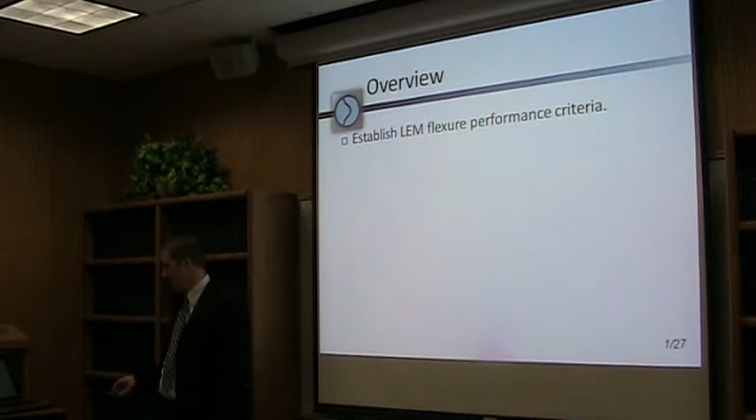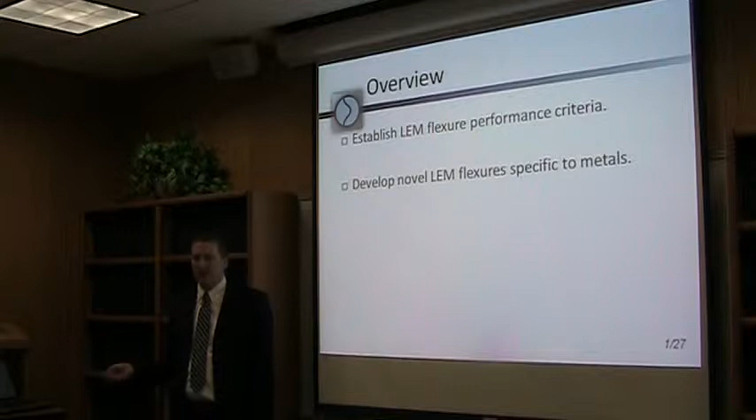First off, I'd like to establish my overview of what we'll talk about today. First, we'll discuss LEM flexure performance criteria. Next will be the development of two new novel LEM flexures suitable for metals, and the application of these LEM flexures in a mechanism.

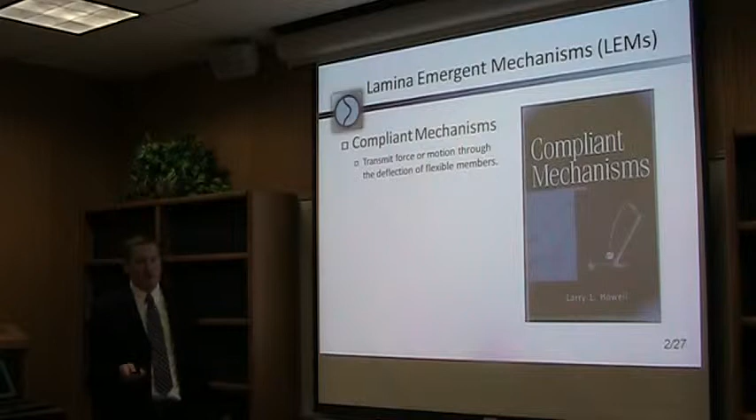First, I'd like to discuss what lamina emergent mechanisms are. We're all very familiar with compliant mechanisms, which transfer force and motion through the deflection of flexible members. Lamina emergent mechanisms are a subset of compliant mechanisms that are manufactured out of a planar material and then function out of that plane of fabrication.

I have an example of a lamina emergent mechanism here that was built by a previous student. It's a 4-bar mechanism. As you see, it emerges out of the plane. I'll put specific force on it, and I could pass this around. I know we've all seen it hundreds of times before, but it's a very good example.

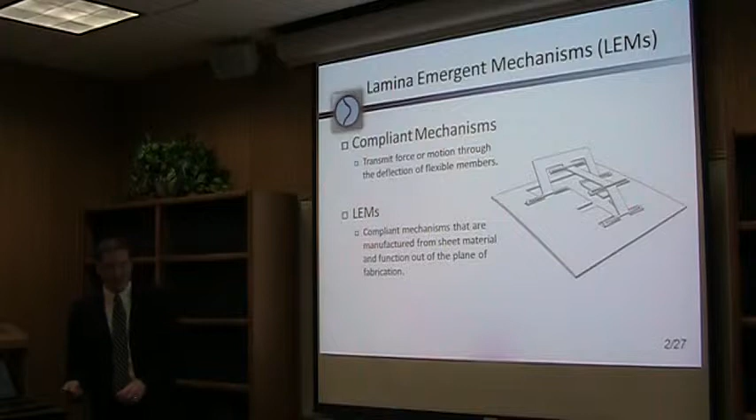Next, I'll discuss a little bit about past research, what's been done before. The materials for the LEM joints that have been made have been specific to materials more like thermoplastics and papers. Right here you see a LEM joint, or a LET joint, developed by Joe Jacobsen.

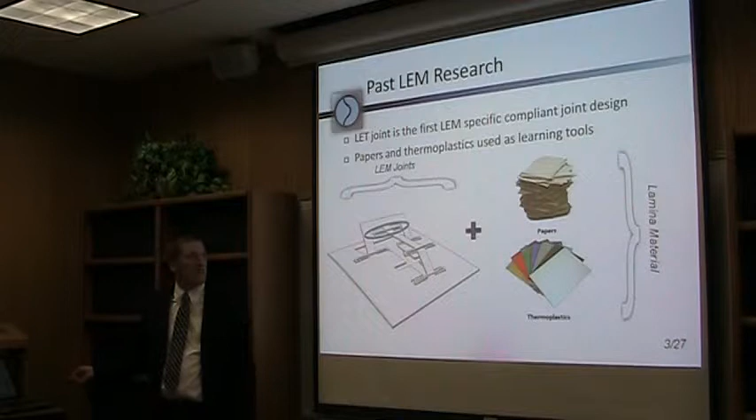These materials I mentioned have been used as learning tools or building blocks toward the ultimate goal material to be used, which is metals. The reason metals have always been the goal in mind in LEM research is, first of all, their low-cost manufacturing processes that are inherent to sheet metals - things like stamping, blanking, and so forth, where you could theoretically build an entire mechanism with just one stamp. Also, metals have unique mechanical characteristics that are very useful.

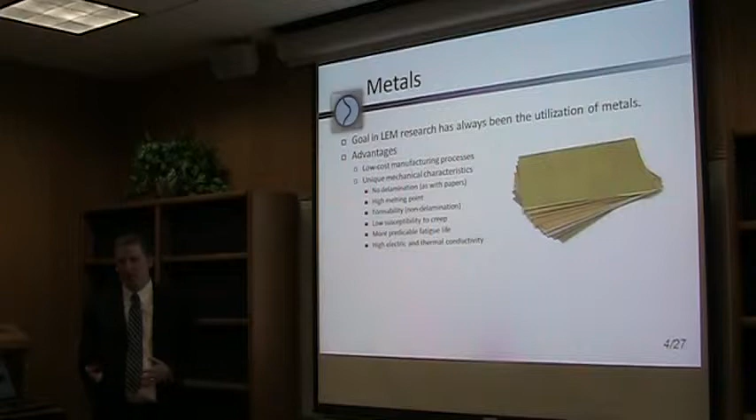First off, there's no delamination, which is something we see in paper. It has a high melting point, has good formability, which allows a new dimension that hasn't been looked at before in creating LEM flexures, which are LEM joints, which we will talk about next.

Low susceptibility to creep, which is important in compliant mechanisms in general, more predictable fatigue life, and higher electrical and thermal conductivity.

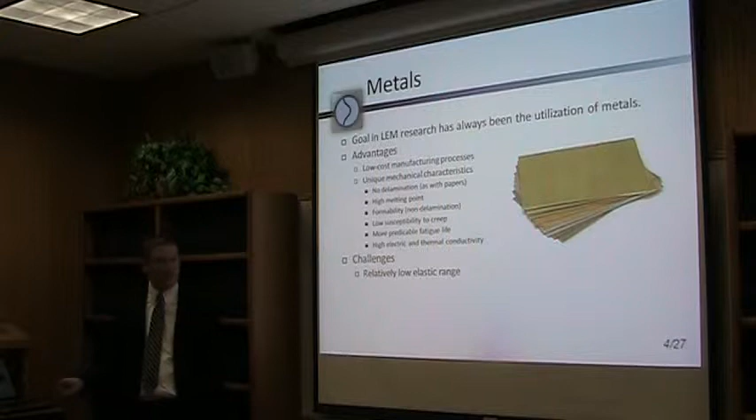Some challenges, just to list a few: metals have a relatively low elastic range, which is an issue in compliant mechanisms. Material cost is often more expensive than regular plastics or papers. Weight may also be an issue, because metals are heavier than other materials on average.

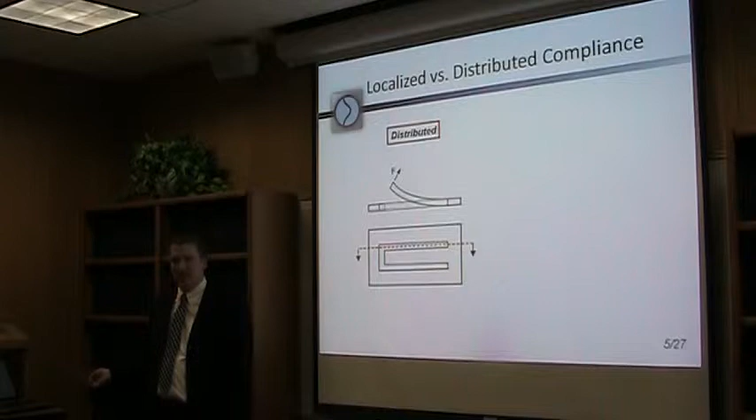Since we are talking about LEM joints, let's talk a little bit about the difference between distributed and localized compliance, or what's sometimes called lumped compliance.

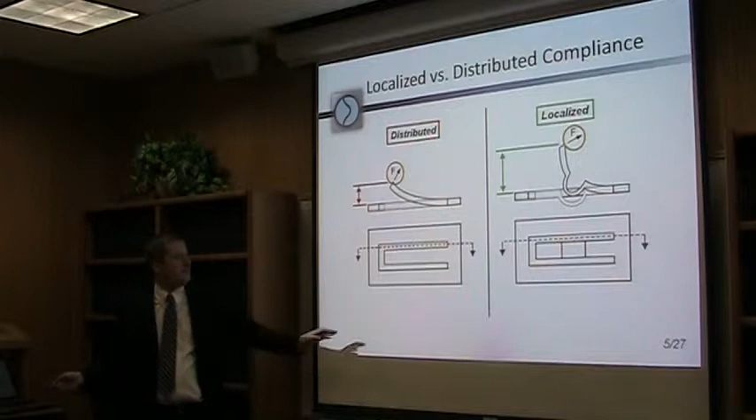So we have two beams, identical lengths on both sides. One has no flexure, one has a flexure as shown in the example. Both have the same force applied. The flexure allows a greater deflection in this figure than the one over here, which is a great benefit.

Let's discuss some other potential advantages to using LEM flexures. One is improved off-axis stiffness ratio, which we'll talk about in detail later. This basically describes how well the flexure, or the joint, would behave in multi-axis loading.

A smaller overall footprint. You can imagine if we were to keep the thickness and width of this one constant, we'd have to make it longer to get the same deflection we get with the joint.

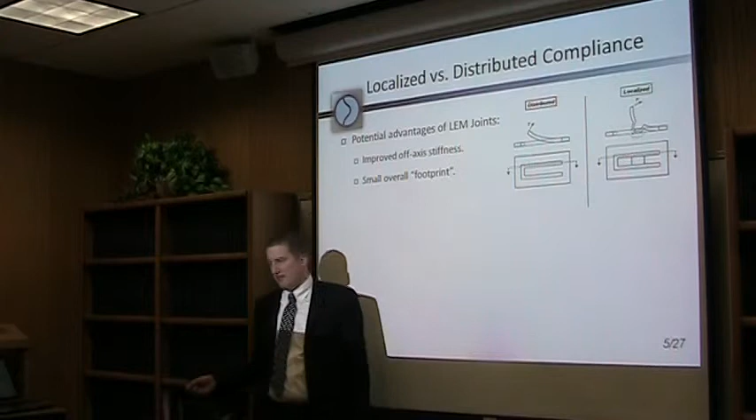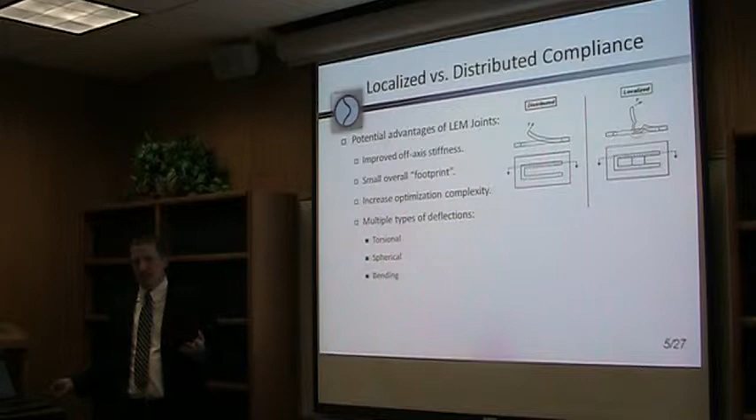There's also a potential to increase the optimization complexity with topologies, because we have more options for creating deflection. These options could be a joint specific to torsion, bending, spherical application, and so forth.

Even though I've been intermixing these two words so far, previous research in LEM joints has specified LEMs as joints, such as the LET joint. However, in metals there are joining processes between two pieces of metal that are very well known, such as lap joints, butt joints, T-joints, and so forth. So to eliminate any confusion, in my research I have referred to these joints as flexures.

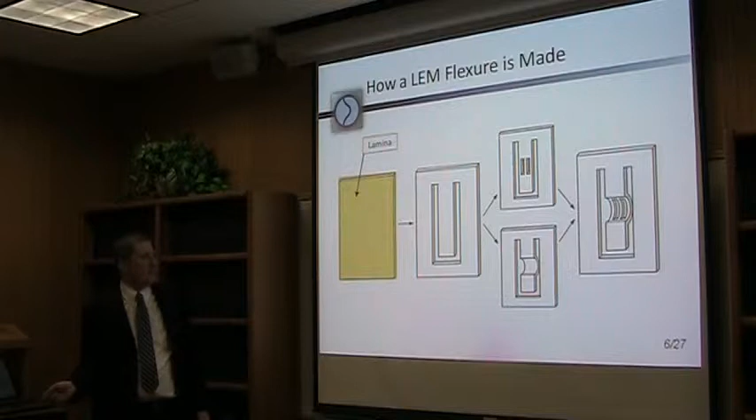Let's look at a little bit of terminology and the process of how a LEM flexure is made, and how we can use the formability of metals to help us out there.

First we have a lamina, then in the lamina we cut out a LEM member. We can create a flexure through removal of material, which has been the past research, or the new research in metals can branch us into forming, or you can use a combination of those.

Now in flexure design, a good question to ask: what are we trying to do? What are we trying to improve from? Do we have a baseline we can look at while designing these flexures to see if they're good flexures?

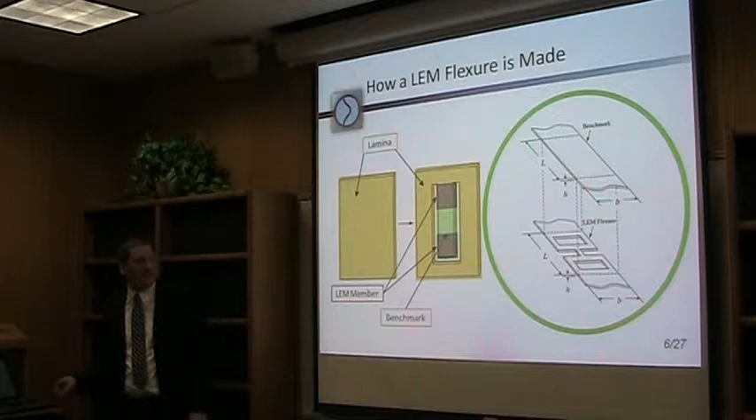So I've developed a concept of a benchmark, which is a strip of LEM member that is the same overall length, width, and thickness as a LEM flexure, as you see in the example. We'll use this more extensively later as we talk about the LEM flexure criteria.

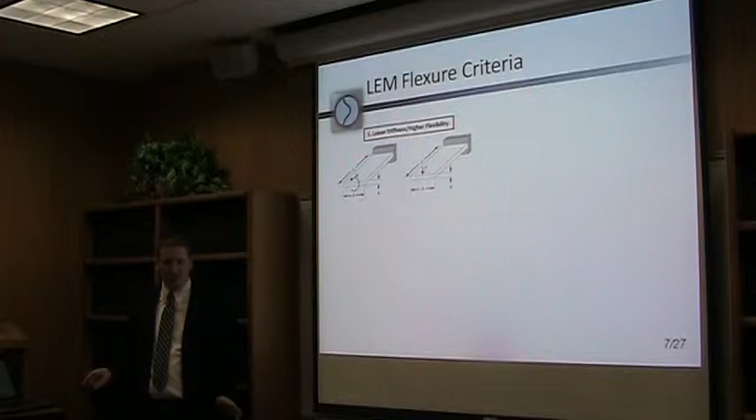Viewing all these things, and knowing there is a baseline that the LEM flexure should improve on, there are three criteria that have been developed to describe this improved performance.

First of all, it would be very nice to have a lower stiffness, a higher flexibility, brought by the LEM flexure over the benchmark. Also, larger maximum motion, as we talked about before in the figure we showed.

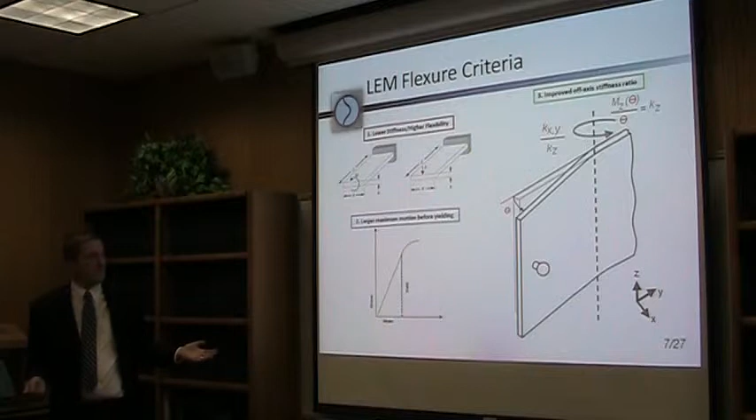Now stiffness is along the other axes, which we wouldn't want the door to deflect around, shown as ky and kx.

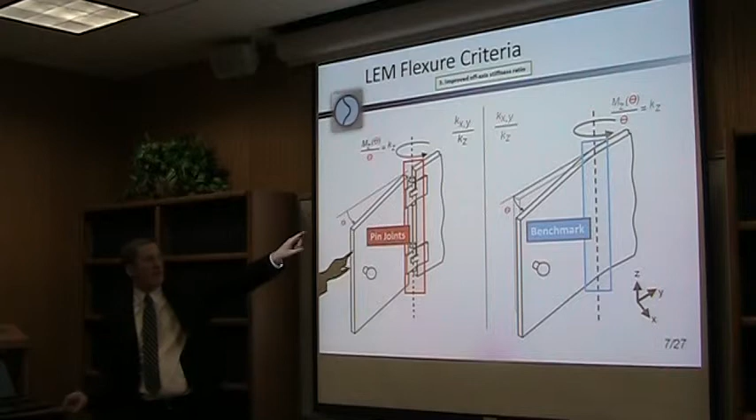Now if we compare this door to a rigid door, the box highlights the points of comparison. We can easily see that this ratio of the undesired axes of deflection and rotation over the desired will definitely be greater with the pin joint. So we see an improvement.

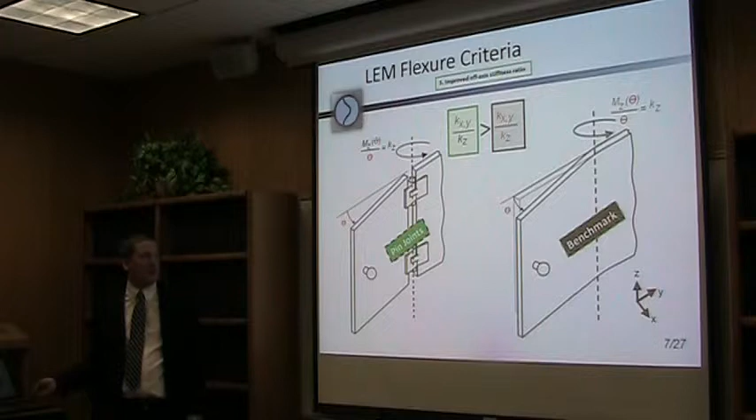So we would like our LEM flexures to have a similar characteristic, in that their design axis of rotation is improved over the other two, or if it's multi-axis, the other one, or whatever have you.

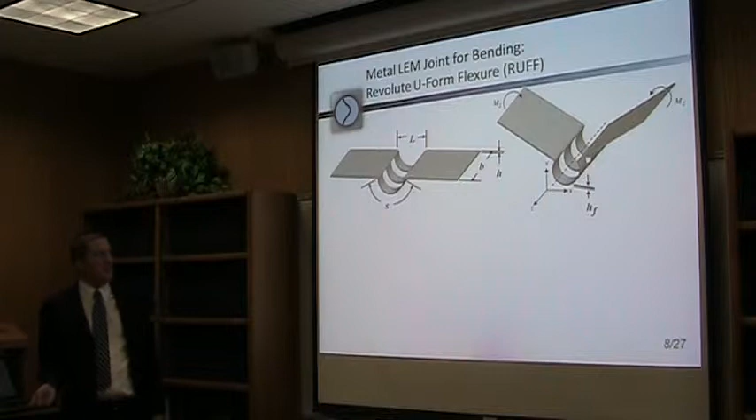So let's look at the first novel LEM flexure. This is the Revolute U-form flexure, as shown in the figure, in the undeformed and deformed positions.

The concept of this flexure was brought about by a research paper by Dai, where he described how you could model a die crease in a piece of cardboard as a revolute flexure.

So here, let's look at kind of theoretically what this joint does for us, or should do. We have the material property dependence and the geometric dependence. The material we won't discuss here, but let's discuss a little bit about the geometry.

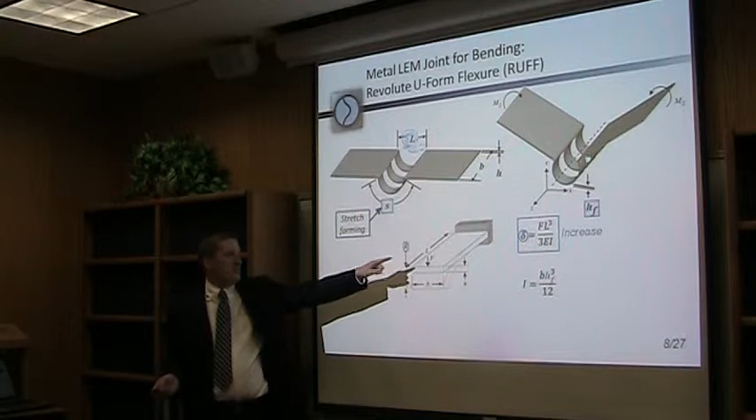The RUFF is designed to be formed through stretch forming, which causes this preformed length to stay the same - that's why it's encased, because it's held constant. This causes the length to increase locally and the thickness to decrease, which causes, going by the equation we have there, the deflection to increase also.

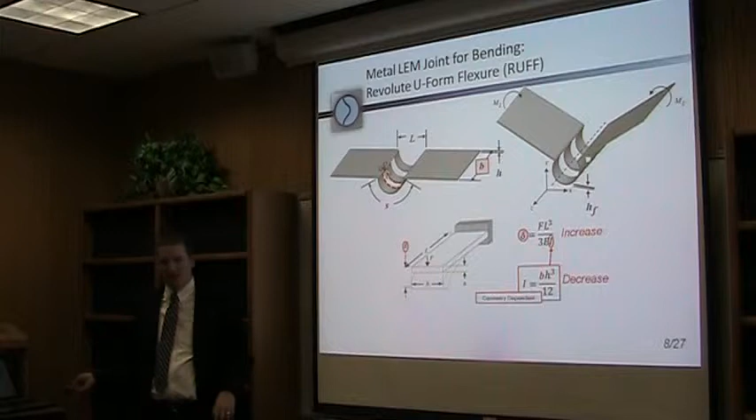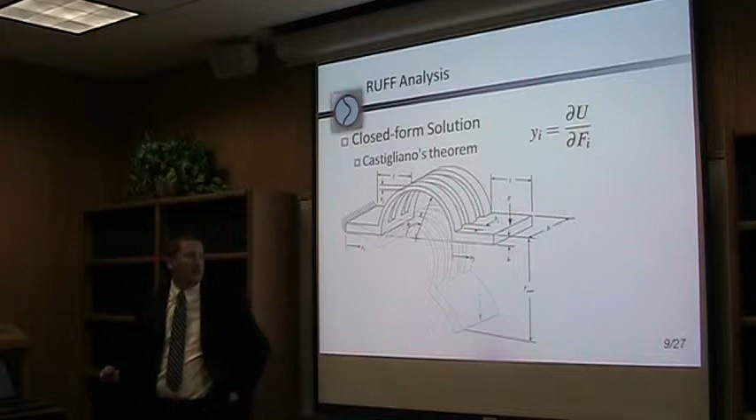Also, we find that decreasing the width will also decrease the moment of inertia, thus increasing the deflection. So the closed form solution we used was Castigliano's theorem, which was the partial derivative of the strain energy over the force within the RUFF joint.

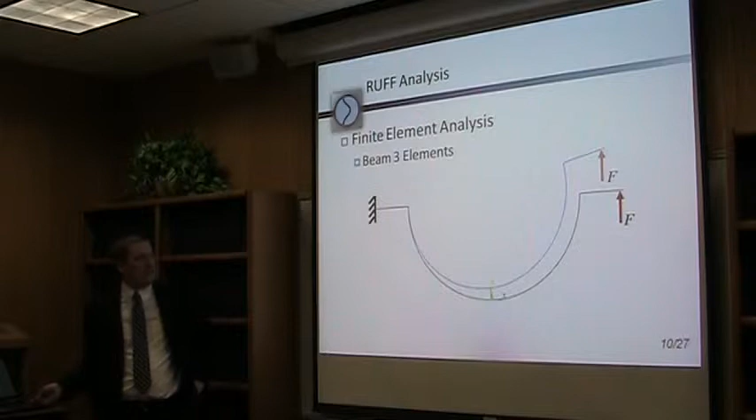And I also created a finite element model with ANSYS using BEAM3 elements. And the elements in the middle, where you have the curved portion where the slots would be, I just modified the material properties for those beams accordingly.

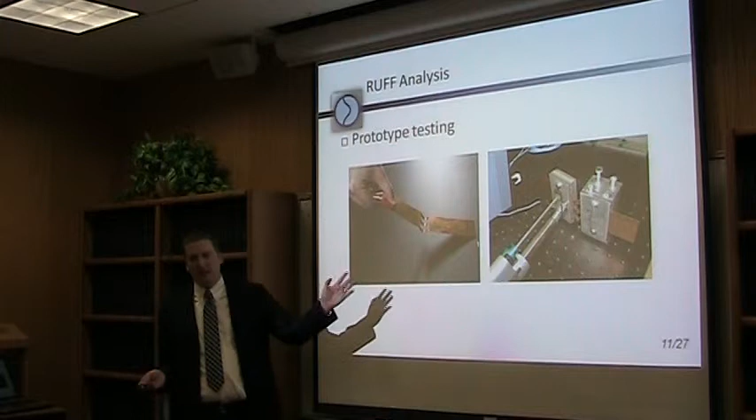And applied a non-follower force, with fixed placement on the end. The reason for those specific boundary conditions was the test setup that we had available to test this joint. As you see there on your right, it's being tested in the test fixture with a load cell gathering the needed data. And I have the actual physical prototype here - I'll also pass around the RUFF joint.

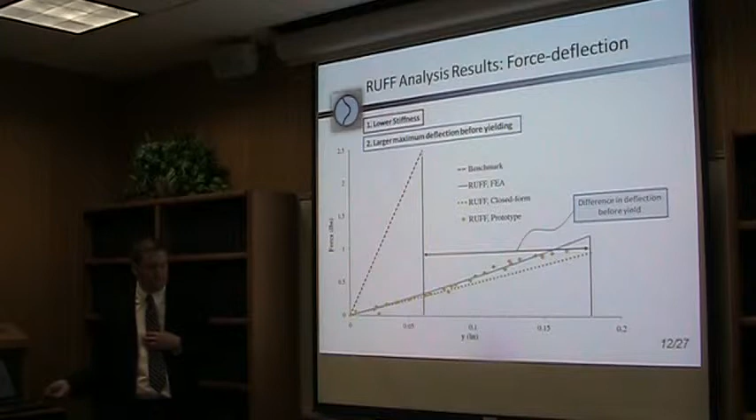So let's look at the criterion. First of all, does it provide a lower stiffness? Well, if we look at the force deflection curve, we can see that the stiffnesses are different and the RUFF is lower. Also, does it have a larger deflection before yielding? It does, as we see, it's very apparent.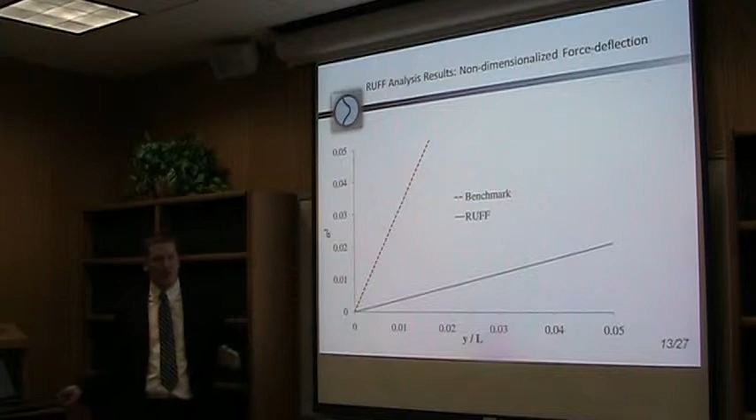Also, I made a non-dimensionalized plot of the data given in the previous plot, and fortunately we also see a difference in slope the way that we like to see.

So off-axis stiffness was also calculated, the stiffness of the torsion axis over the stiffness caused by a moment. And in this instance, the higher the off-axis stiffness ratio, the better. So the blue line representing the RUFF is indeed better than the benchmark cutoff, again at the yield point - so we see an improvement in off-axis stiffness ratio.

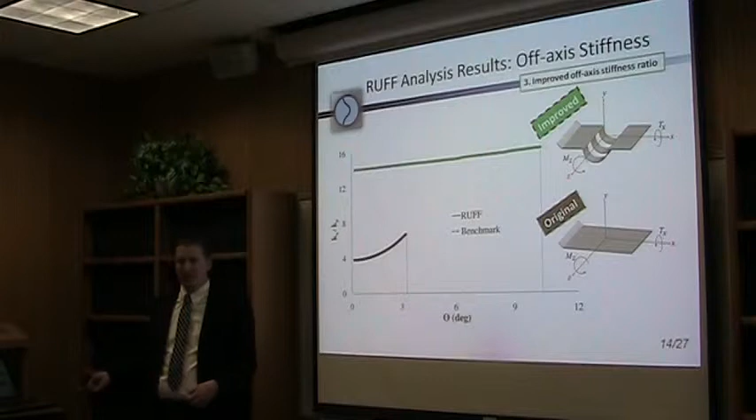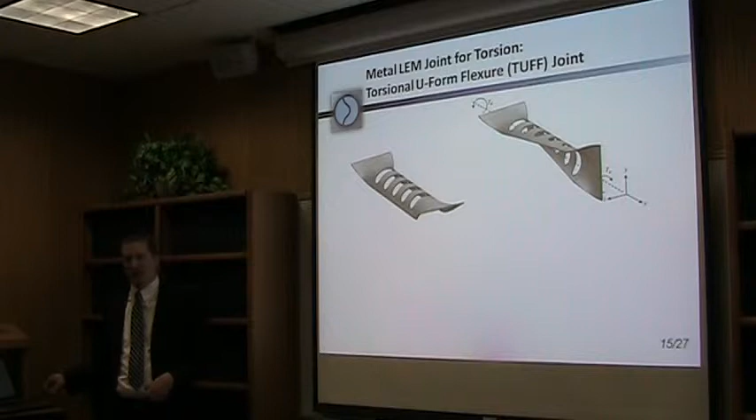So now we've discussed the RUFF, let's go over the TUFF joint, which is a torsional U-form flexure, and this one is design-specific for torsion. And as with the RUFF, let's look at some of the things that make this joint ideal.

So as we decrease the width here, even though it's not as easy to see in this equation as it was in bending - this is a torsion equation here - we have a decrease in width, and that would cause an increase in rotation.

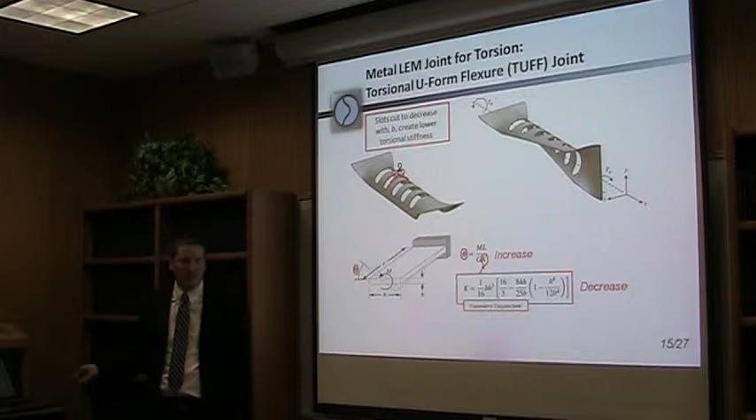Also, the decrease in width would... Could you go back to the previous slide? Yes.

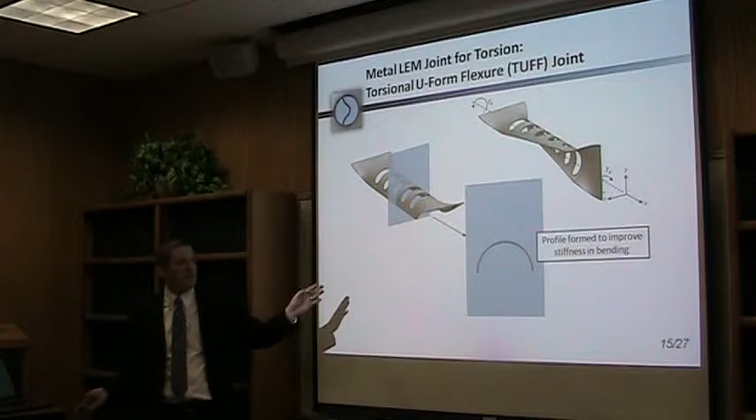The polar moment of inertia. This decrease in width would potentially create off-axis problems in bending. So to eliminate that anticipated problem, I designed a round profile form for the joint.

I created a finite element model with ANSYS shell 93 elements, and here are some of the boundary conditions I used. I fixed one end, made it infinitely stiff, and set boundary conditions at three key points. The two on the edge were set so when torqued, the model wouldn't...

...compact in the y-axis due to— wouldn't pull in, right? Yeah, wouldn't pull in, exactly. Looking for the right word. And here, the translation in all three axes were fixed.

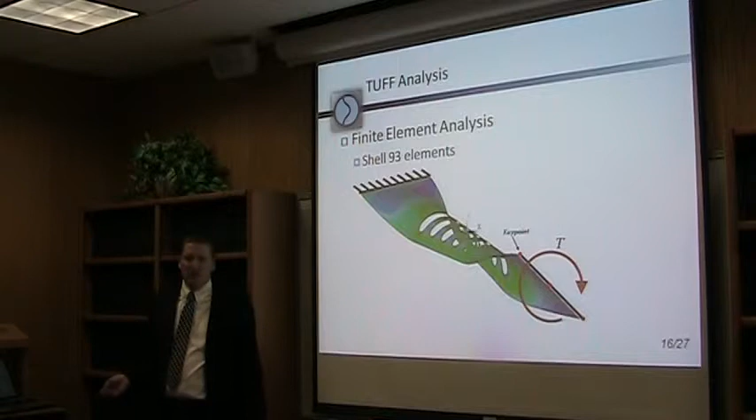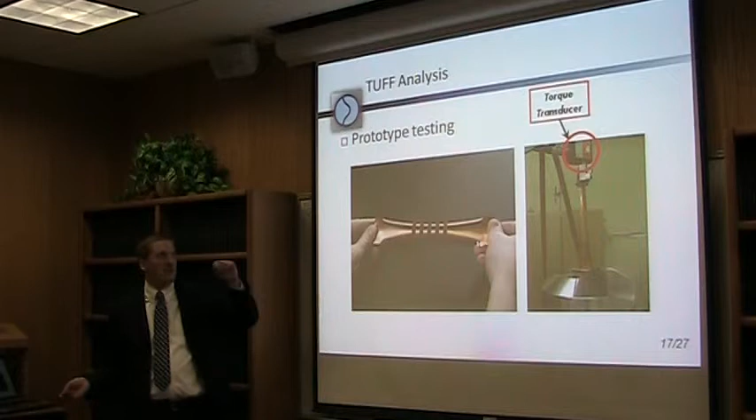Torque was applied to create the motion we wanted. Here we have the testing of the prototype in the Instron with a torque transducer used to get the torque rotation curves. Again, we have the benchmark and two solutions for the TUFF. The data compared between the prototype and the FEA very well.

So let's look at the criteria. First, you do see a difference of slope, not as much as with the RUFF, but it is a difference, especially the closer you get to the yield point. There is larger rotation before yield.

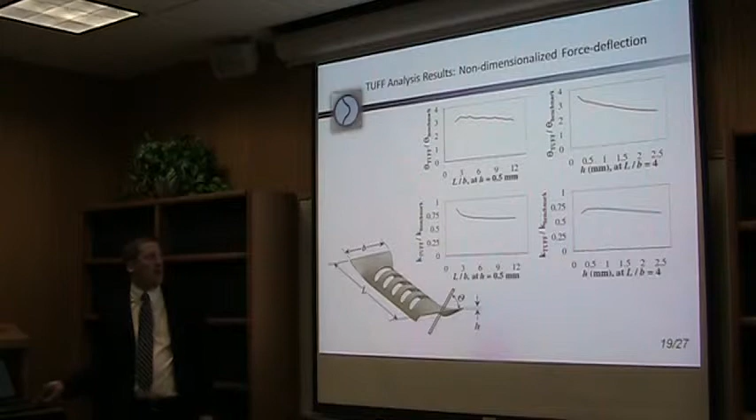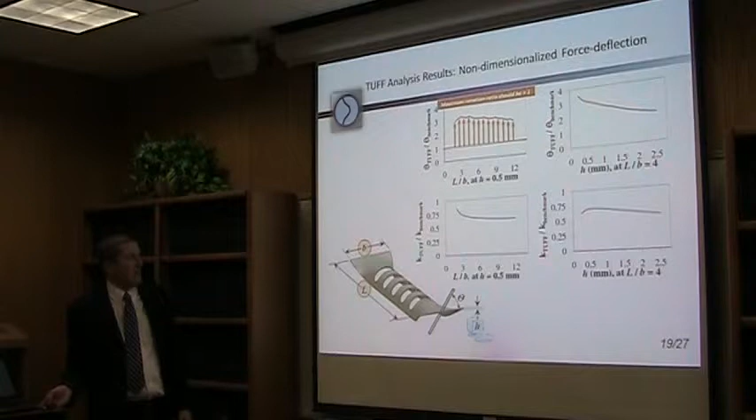And with the TUFF, we did a little bit of a generalization of the dimensions. This first plot shows a ratio of the maximum rotations at different ratios of length over width, as we go from about 1 to 12 values of the ratio, with the thickness held constant.

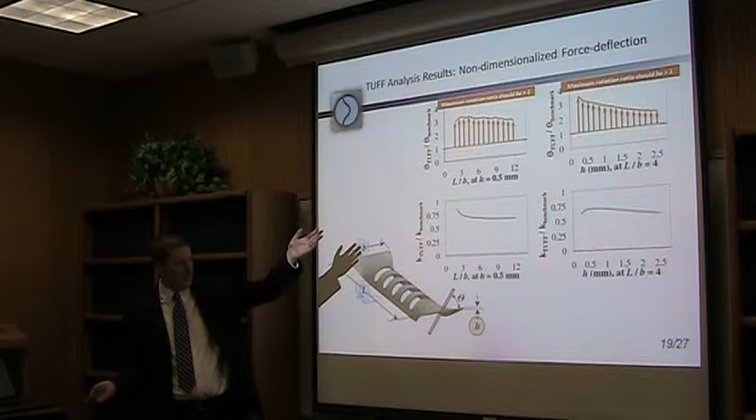Here we've kind of flipped it — same y-axis, but now the thickness is being varied and the ratio of length to width is held constant. These plots show, with the arrows, that as long as the ratio of maximum rotations is above 1, we should be pleased with the performance, because it will meet the criteria — meaning the maximum rotation of TUFF is greater than the benchmark.

In this situation, we're comparing the slopes in the form of stiffness, where the ratio of stiffnesses should be less than 1. We have the same situation on the horizontal axis as before.

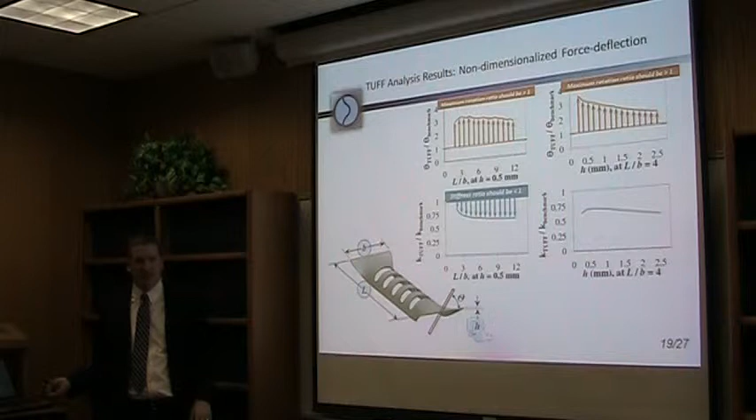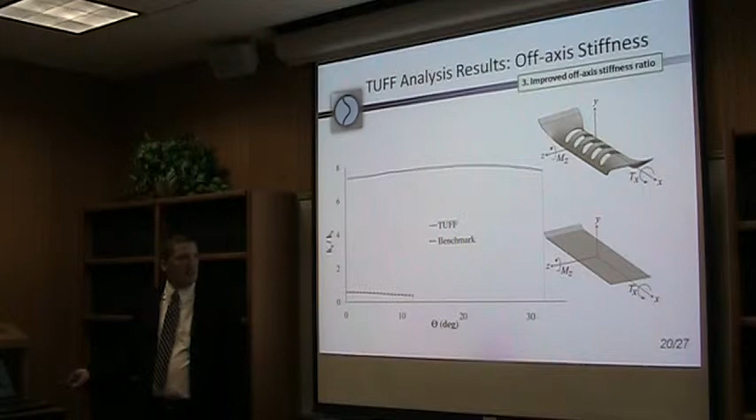So let's look at the off-axis stiffness ratio for the TUFF. Here we find that we do indeed have improved off-axis stiffness performance. Primarily, I think you would agree, due to the profile that has been formed there.

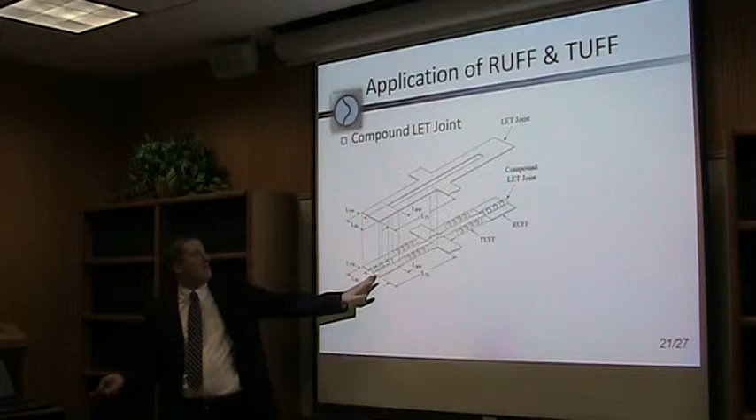Now that we've looked at these two novel joints, let's look at an example of applying them together in a mechanism. It seemed ideal to combine them in a LET joint, which has four members designed to be put in torsion and two designed to be put in bending. Where there's torsion, I put the TUFF; for bending, the RUFF. This is what I'll refer to as the compound LET joint.

With that compound LET joint, I designed a basic crank slider with the compound LET joint at those locations. Before we go any further, I'll show you the biggest prototype I have here of the crank slider with the compound LET joints. I'll just actuate it here real quick so you can see.

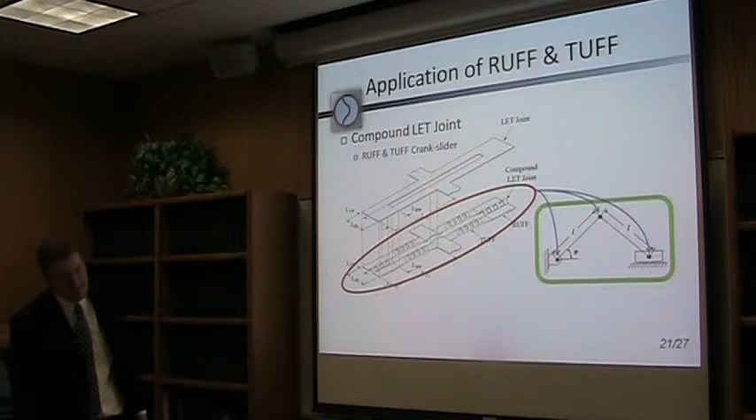That's how it performs. How far are you from the yield point of the material at the highest stress in that position right now? Going by the FEA analysis I did, it's roughly at yield at that point. Just feeling the resistance of the material when I bend it physically, that seems to be true.

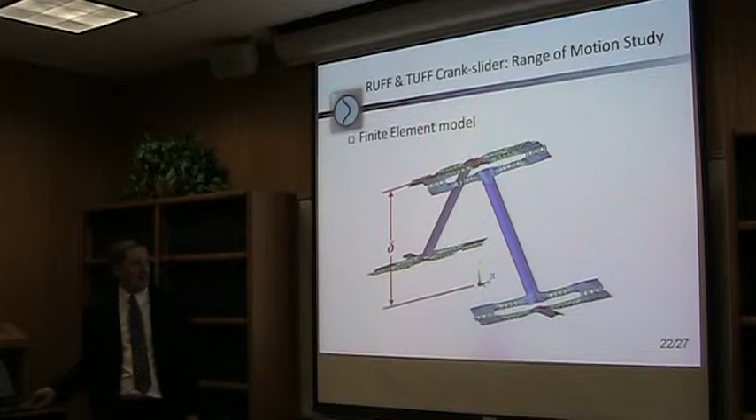So let's look at the FEA model. Here it is in the flat position and an actuated position, actuated with a displacement in the middle. A full model would have one end fixed and the other end's translations and rotations fixed in this manner.

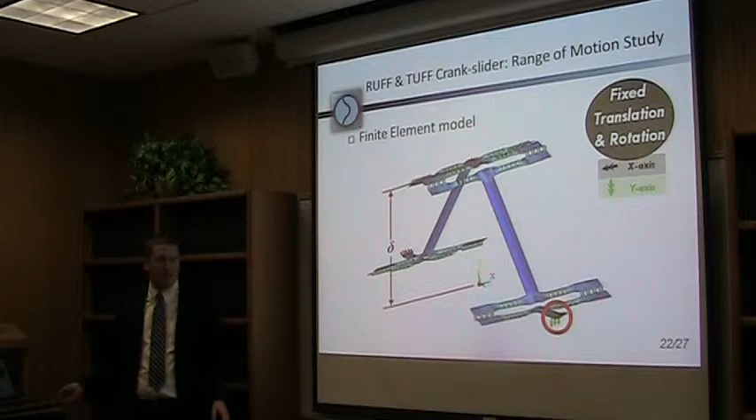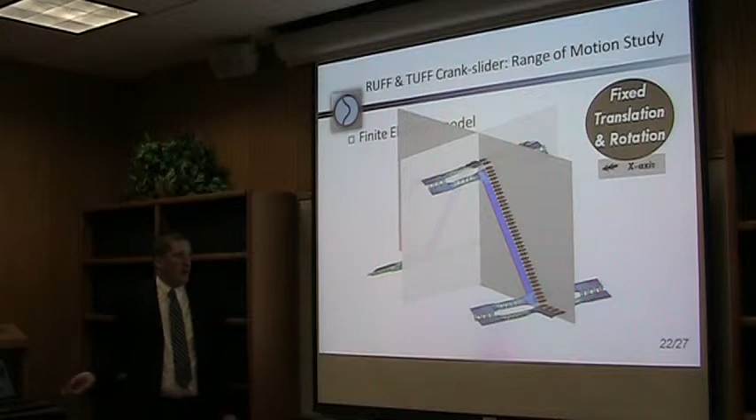However, I deflected it in the middle so I could create a simplified model that would be easier to compute in ANSYS. I fixed it around these axes and edges to create the desired effect, so it would behave as the full model would.

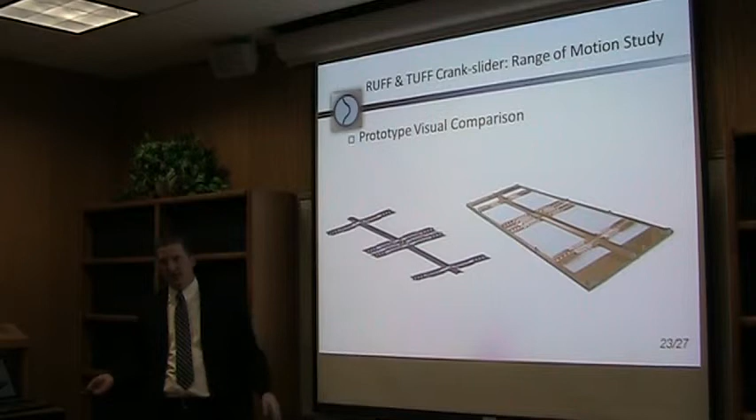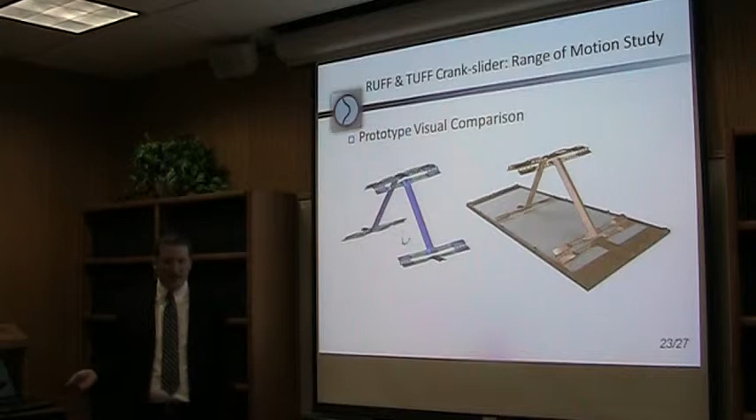So let's compare the prototype visually to the FEA model — the deflection between both. That's undeflected, that's deflected. They look pretty similar, and they're at about the same angle to one another. So that's very good.

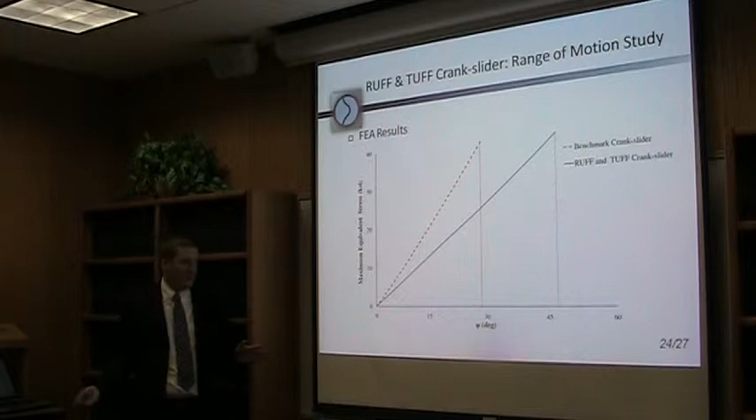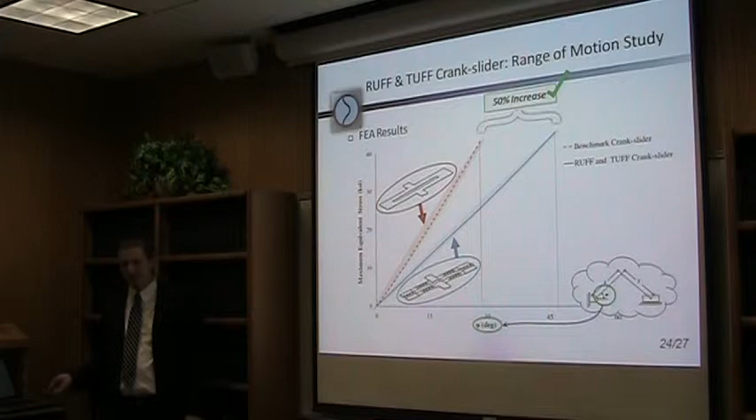The FEA results I ran on this crank slider show, on the y-axis, the maximum equivalent stress throughout the whole mechanism as it is deflected, or as this angle advances. As a reminder, this is the crank slider with the compound lap joint compared to the regular lap joint, and we see a 50% increase in motion with this analysis.

The summary and conclusions: the following items were successfully accomplished in my research. First, I was able to create LEMs from sheet metal.

With a focus on flexures, even though I did have an application in my research, most of it has been on the deep analysis of these flexures, and also the introduction of a benchmark for comparison, which can be used in the future as a design tool.

Also, the establishment of a performance criteria has been set forth, based on the concept of relative performance to the benchmark.

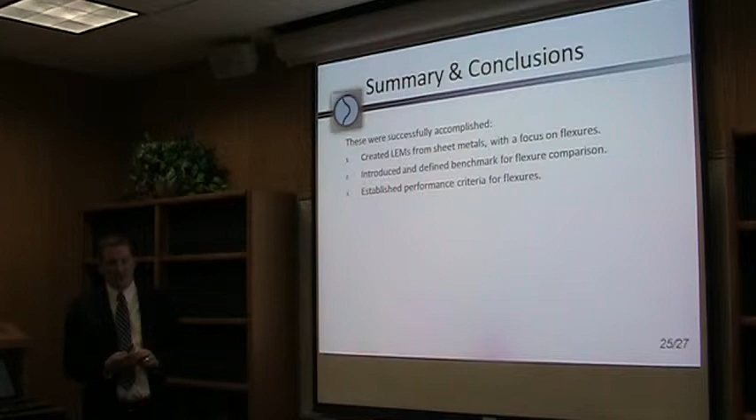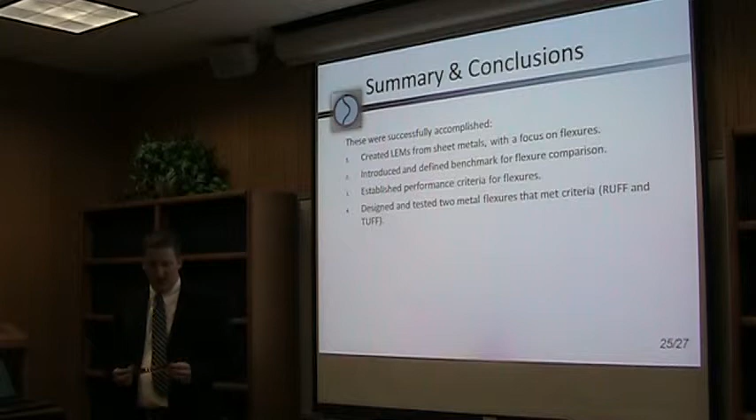I have designed and tested two prototypes of the RUFF and TUFF, which, as I've shown, and done analysis of it. Performed an in-depth analysis and shown that the prototype and the FEA match up very well, which had a lot to do with boundary conditions.

I developed a crank slider mechanism to apply these elbow joints to.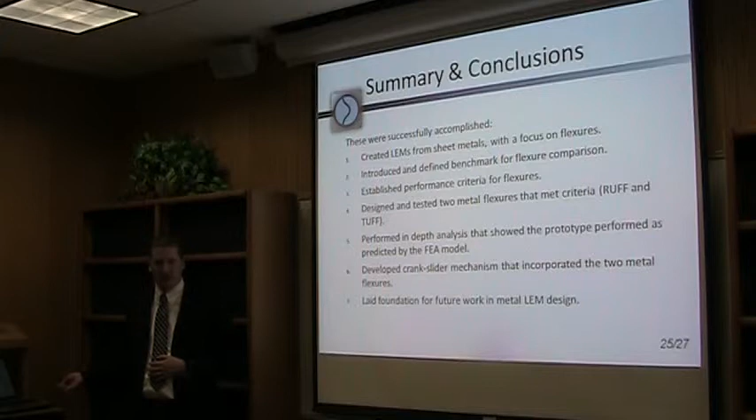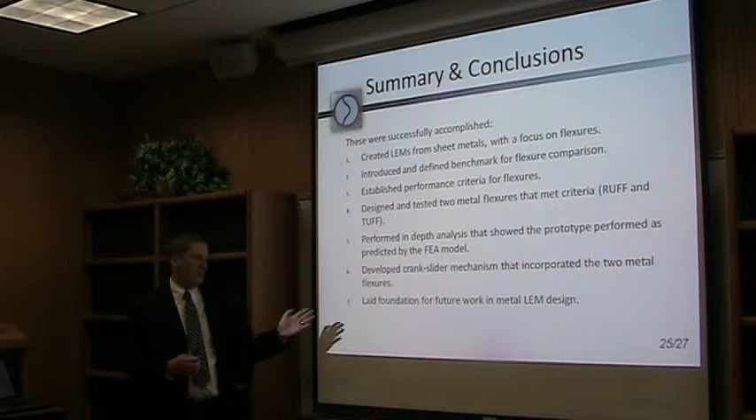And all this, I believe I had successfully laid a foundation for future research in the area of LEMs, and metal LEMs specifically, and also laid the foundation for a research paper that I'm planning, that Dr. Magleby and I are planning, to submit to the Journal of Mechanical Design in the next few days.

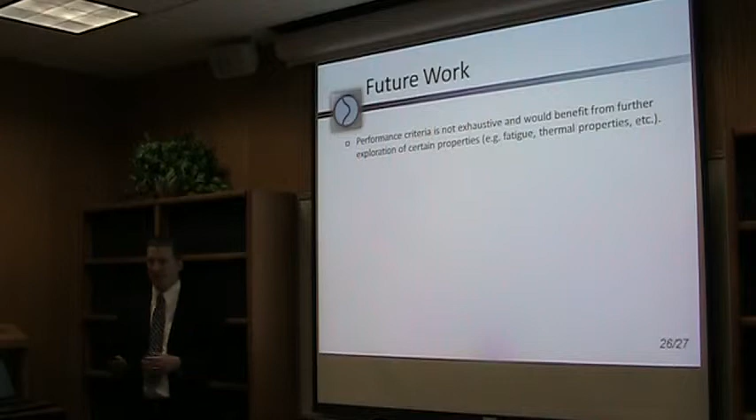So some future work that could be done off of this research: first of all, the performance criteria obviously is not exhaustive. It can be expanded to benefit further exploration of certain properties such as fatigue life, thermal properties, and other design variables that you would be interested in.

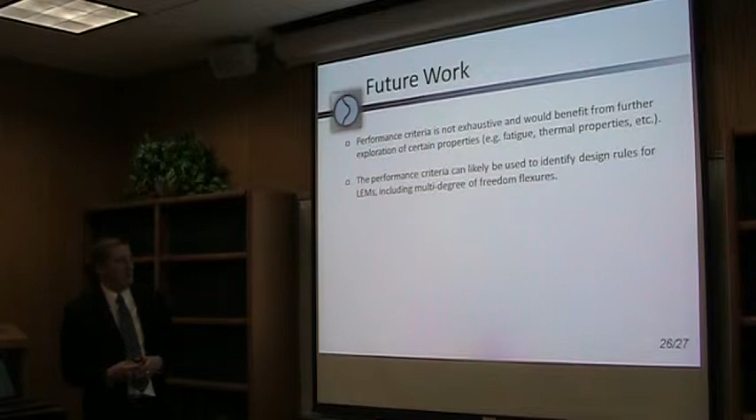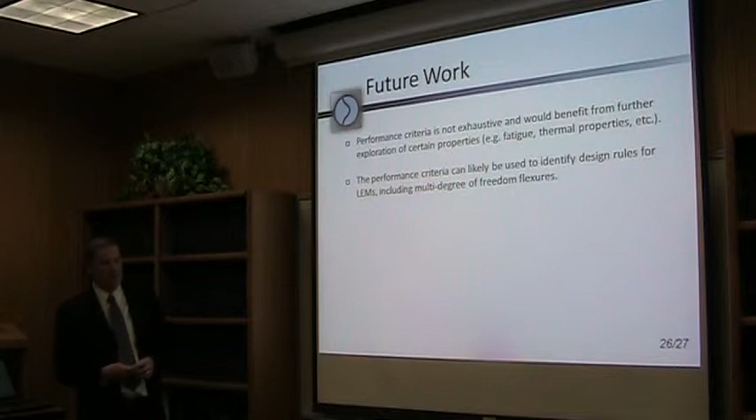The performance criteria can likely be used to identify design rules for LEMs. This would include the ability to design multi-axis degree of freedom flexures, unlike the just single-axis ones that we've seen here. Also, other materials, as in other metals, options between other metals should be explored.

Of course, between different metals there's lots of variability in cost, in weight, and properties, and so forth. So that is definitely an area that could be looked into further.

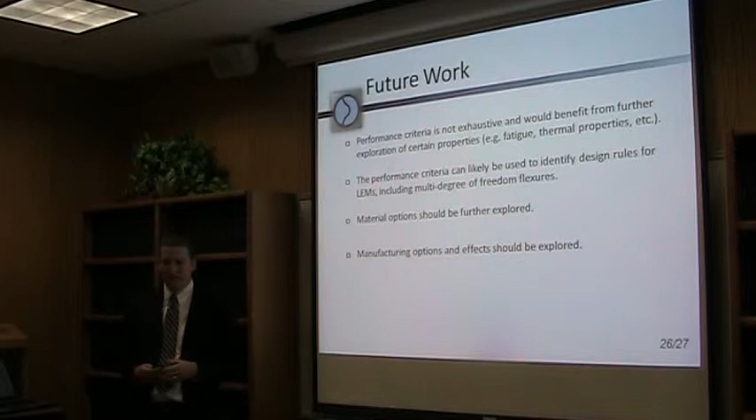Manufacturing and the effects of these manufacturing processes could also be explored, and should be. This could be on more of a material science level, looking at the effects of changes in grain boundary, which would cause things like work hardening and so forth.

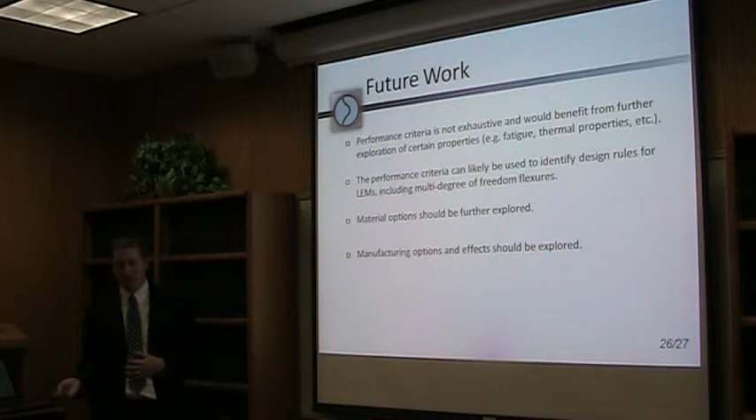Also, further applications of the LEMs should be continued, which is the umbrella goal that we're shooting for with one application.

So I'd like to acknowledge in my research, first of all, the National Science Foundation, who provided the funding to make this research possible. Dr. Magleby, for his continued patience and his desire to meet with me as often as I needed, which was probably more often than I probably should have, but it helped me a lot.

Dr. Howell and Dr. Todd, for all the time that they had put in from their busy schedules to help me in this work. Some undergraduate students, which have been very vital.

Amanda Pouet, who is the one that built and programmed the force deflection tester that we used to test the RUFF. Most of all, Isaac, for making everything that I passed around here out of copper.

Designing how they would be built, designing the test fixtures and so forth. And Nathan Llewellyn, who also helped in fixing this prototype to the polypropylene board.

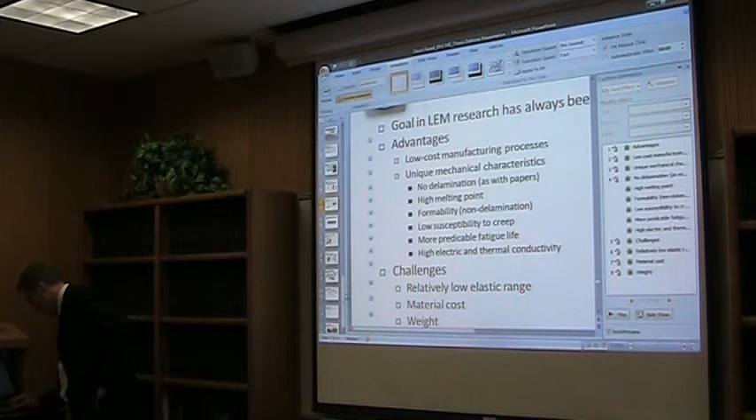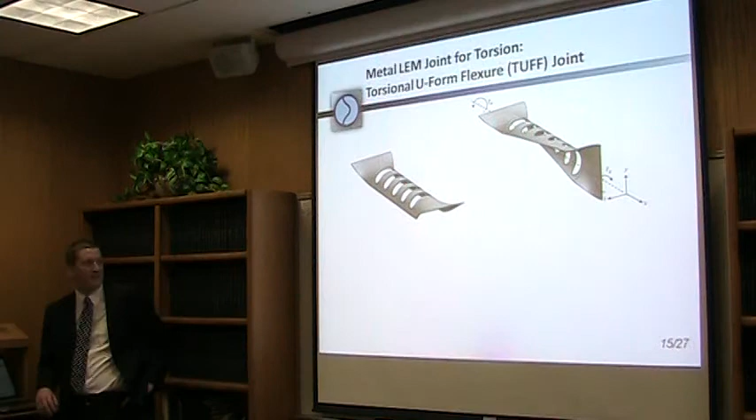Could you go back to slide 16, Devin? Yes. Sorry that the phone rang. Oh, it's okay, in the middle of some challenges. No problem. Let me advance it here.

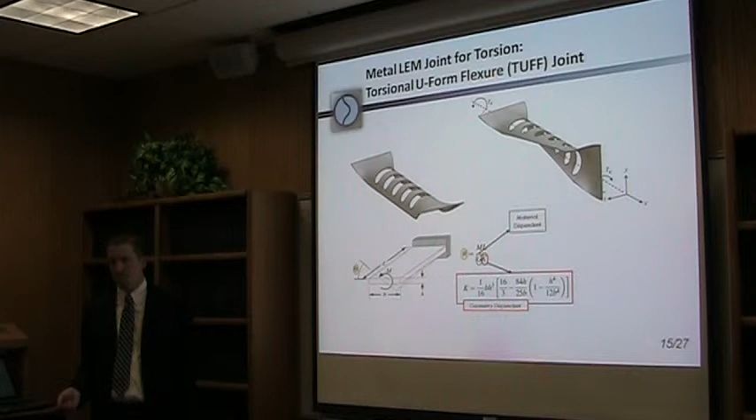You mentioned that the end that was not fixed, you considered to be infinitely rigid. Is that right? What would happen if you chose some other boundary conditions? What do you feel that would do in terms of differences? Because if it's infinitely rigid, it's somewhere between that and something else.

Move on to the slide, Devin, where you show the three nodes you locked. Okay. I used some of Dr. Chase's knowledge on these boundary conditions, and he was telling me that if I didn't make it infinitely rigid and just constrained this point to where it didn't translate, you can obviously tell what's going to happen. It's just going to rotate right here and deform on the end.

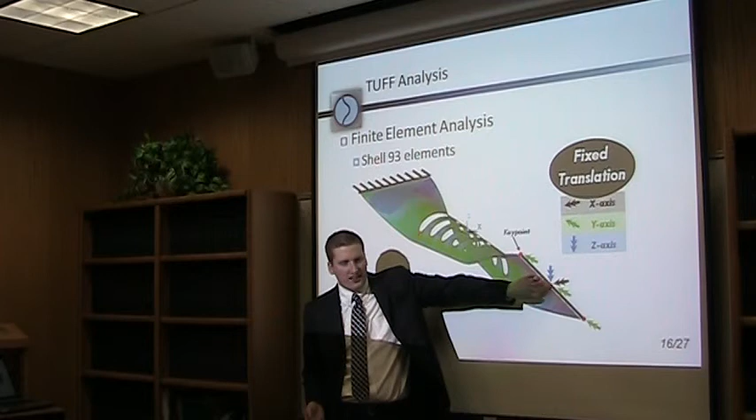If I didn't make it infinitely rigid, I think the prototype wouldn't have matched up as well, because even though in the prototype it wasn't infinitely rigid, with the low torque that I put on the prototype, it essentially was, in respect to how much torque I would have needed to deform this area much.

You didn't try putting a crimped piece on the end to stiffen it, to see whether or not the interaction would be more matched to the analysis that you did? I didn't. I guess the main reason behind that is because when I saw how well it matched, I didn't feel a need to take the time to do that.

Now Devin, seems like when we first did that one, you didn't use that exact boundary condition, right? And then we got the results back and said, whoa, something's wrong here, right? Remember that? Yes, it took a while to finalize on that. The first one, we just held the center, and as it turned, it would twist, because of the shear. Yes, because of the shear around it, and we said, well, we should be modeling with a big chunk out there, right? Went to this boundary condition.

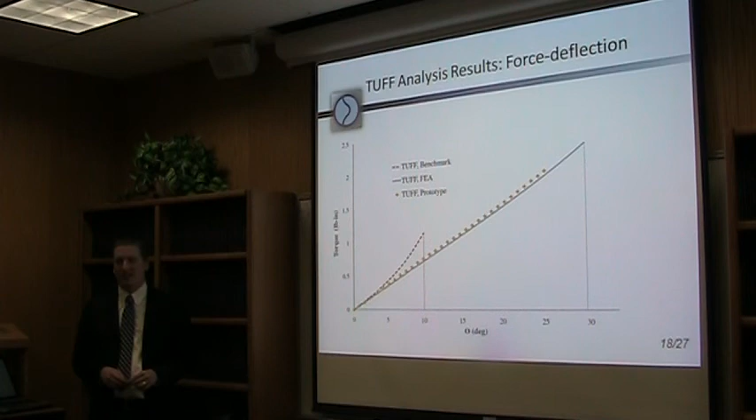Other questions? I think everybody in the lab has seen this a few times, even yesterday, so... All right, well, I think more applause is in order for Devin.

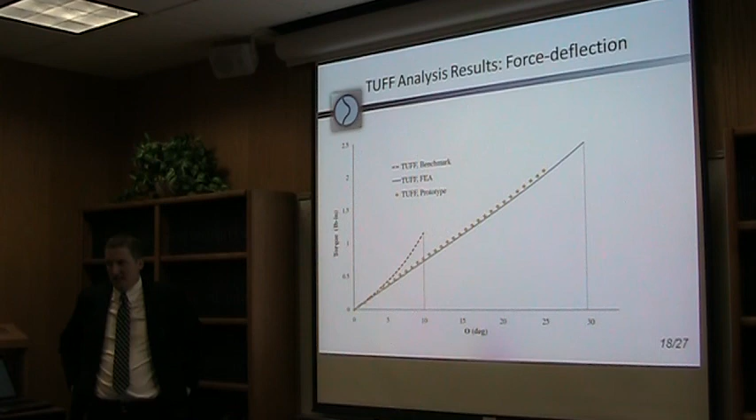And how about we excuse you all while we grill Devin for just a bit? Should I leave the PowerPoint? Yep, that'd be great. Oh, yeah, turn the camera off here, take the temperature. Oh, yes. Some language just shouldn't be recorded.